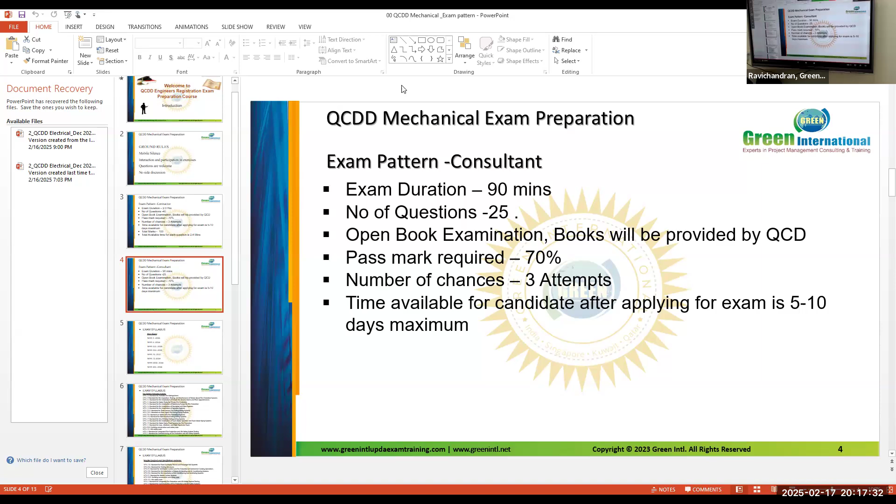So the syllabus - this is for the fire alarm, part of it. For the exam syllabus, it starts from firefighting: NFPA 3, 4, 10, 13, 14, 16, 17, 17A, 20, 22, 24, 25, 101, 2001, 2010, 750, and 5000. This is the exam pattern for firefighting.

All your questions will be focused only within this syllabus; apart from this, questions will not be asked. For example, for a standard like NFPA 110, they will ask what NFPA 110 refers to - it is the standard for emergency standby power systems. So you have to know that.

Actually, it's a multiple choice question. You don't have to worry about it or memorize anything else. You just have to focus on what is being given in the question, and where to hunt for the answer.

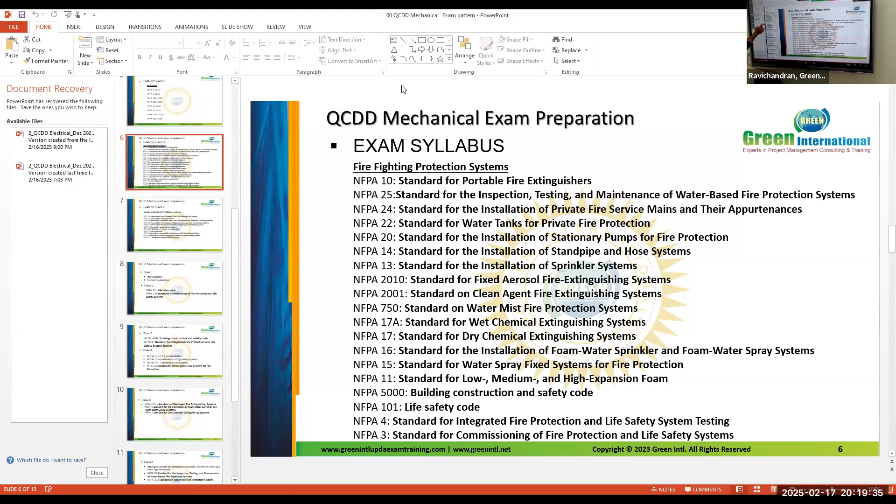So the exam syllabus for ACMV, or air conditioning and mechanical ventilation, has these 4 topics in common: NFPA 3, 4, 101 and 5000. It's common for all - for firefighting, ACMV is common, even for electrical, same.

So apart from this, mostly concentrated on 88A, 90A, 90B, 92, 96, then 130, 204 will be there apart from the common syllabus. ACMV is a very small topic focusing mainly on QCDD guidelines.

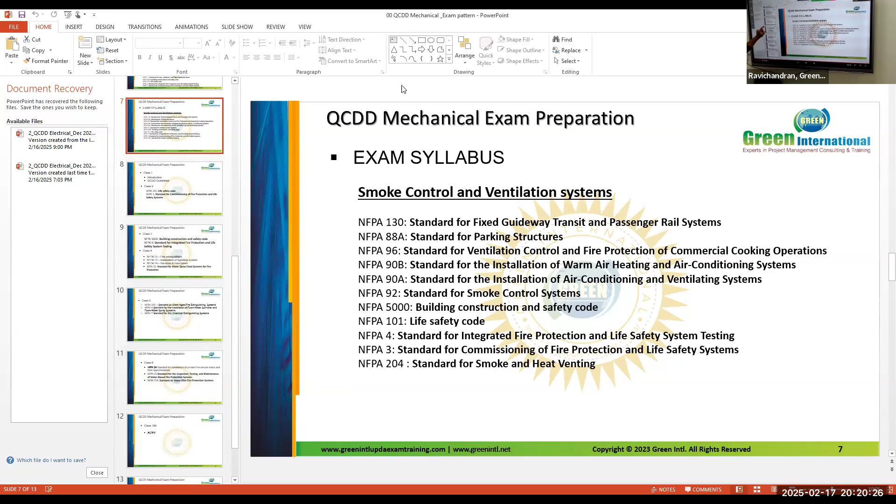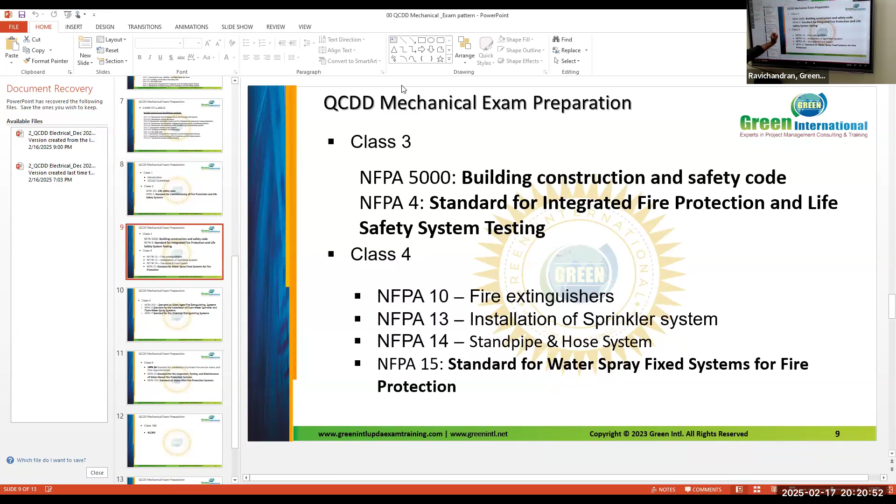So the classes are subdivided into 8 classes totally. First class is the introduction class, where we will guide you through the QCDD guidelines - today we will see only the QCDD guidelines. After that, the second class will be focusing mainly on 101 and 3, and the third class is for 5000 and 4, and fourth class is for 10, 13, 14, and 15.

So based on the requirement of the candidates, because some candidates may have an urgent exam at the very early stage - maybe they have applied for the exam and they appear for the class - based on their request, we may bring ACMV at the top in the initial classes and firefighting in the next class. But that will purely depend on it after our third class, because first class is common for all, second class is common for all, because NFPA 3, 4, 101 and 5000 is common for all.

So after the third class, they can decide either to go with ACMV or with firefighting. I don't have any issues to start with the classes, but it's a pure choice - we can go either with ACMV or with firefighting, and ACMV at the last. We can discuss at the third class which direction we have to move.

So this is all about the exam syllabus and pattern. Is there any doubt until this? There is no negative marking in this exam, and it's an open book exam, but it's not so easy as that - you have to be very familiar with the NFPA standards. That's the main thing to crack this.

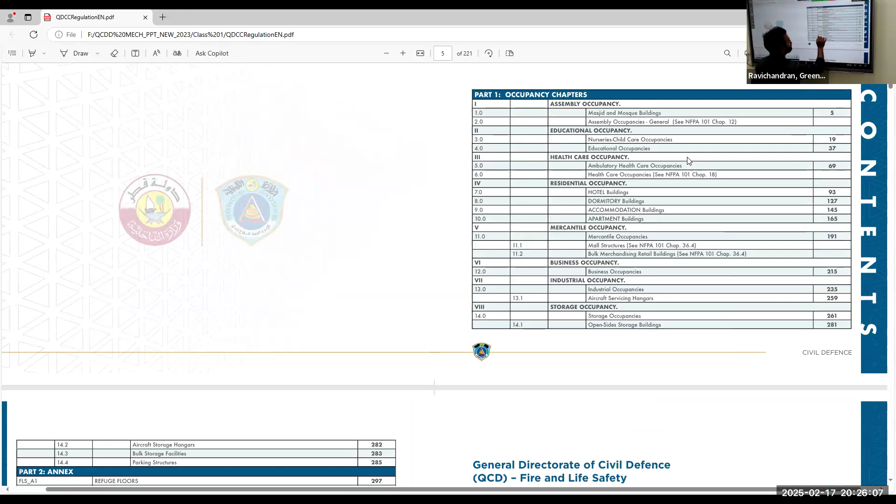Okay, so in the occupancies chapter, you can see there are different types of occupancies: healthcare, educational, assembly occupancies, mercantile, until the storage occupancies. In these topics, the questions mostly will be focused between residential, mercantile, and some questions in business occupancies. Within these three occupancy groups, the weightage of questions will be more.

It's not easy to study or learn through all these topics line by line, but instead please do focus on this group. There you will get more questions within this group, because if you read one occupancy group, the similar patterns can be repeated in all other groups, like habitable height, means of egress. All these things will repeatedly appear in all the occupancy groups, with only a minor difference. So you have to focus on three different groups: residential, mercantile, and business occupancies.

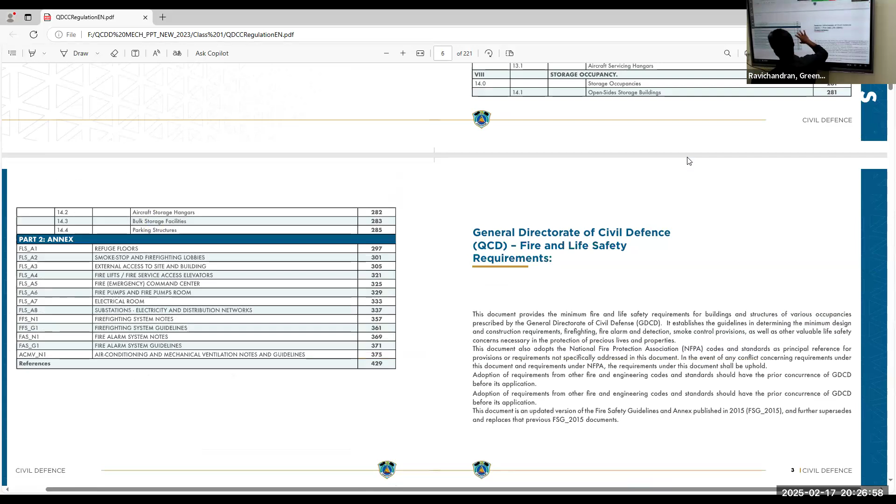And apart from this, the question will be mostly asked from this annex section. From the annexer section, there will be refuge floor, smoke stop and firefighting lobbies, external access. There are different types of annexer sections. If you are focusing as a consultant, you will get all these questions from all these topics in the annexer section. There will be almost 200 pages. You will get questions from between 297 and 429. There will be plenty of questions in this annexer section.

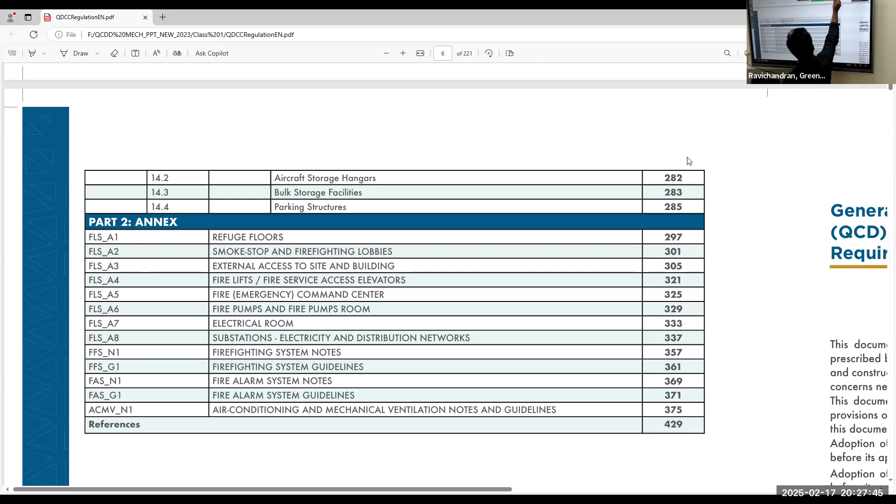If you are a contractor, if you are in firefighting, so you have to focus on firefighting system notes, fire pump, and fire pump room. That's it. These three topics you have to be very clear about for firefighting.

And if you are for ACMV, you have to focus on ACMV. This is very important for ACMV. So if you are a contractor for ACMV, this topic is very important to get it passed. Without studying this topic, you cannot pass. If you are appearing only for the ACMV, this topic is so important because it's around 50 pages, but more weightage of questions will be from this section. If you are appearing for the ACMV exam, or if you are appearing for the firefighting exam, you have to focus on these main three groups apart from the occupancies.

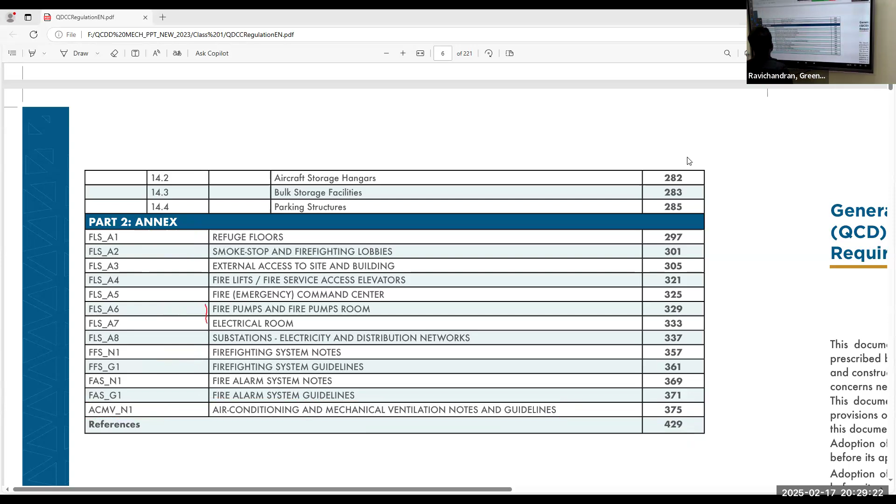Okay, this is for QCDD guidelines. So if a question is being asked, let's say a question, what they will ask is, they will give you a ramp slope. Maximum slope shall be 1 in 12 inch.

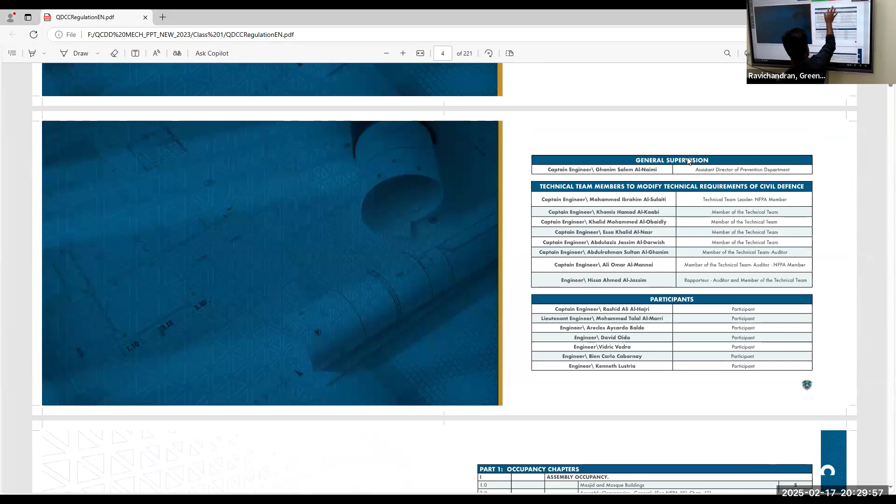Maximum cross slope shall be 1 in 48 inch for this occupancy group. Let's say this is masjid and mosque, and masjid and mosque comes under assembly occupancies. So they will not say masjid and mosque, they will give you assembly occupancies. So the ramp slope of this parameter, ramp slope of 1 in 12 inch, that is slope, maintenance of slope, is required, permitted, allowed or not allowed. The options will be given like this. So you have to know this content where it is in the assembly occupancies.

You have to go to the ramp section. You have to check whether it is required, permitted, allowed, or not required. So there will be options like that, because here you can see required, and in some areas you can see it is not required, and in some areas it will be permitted.

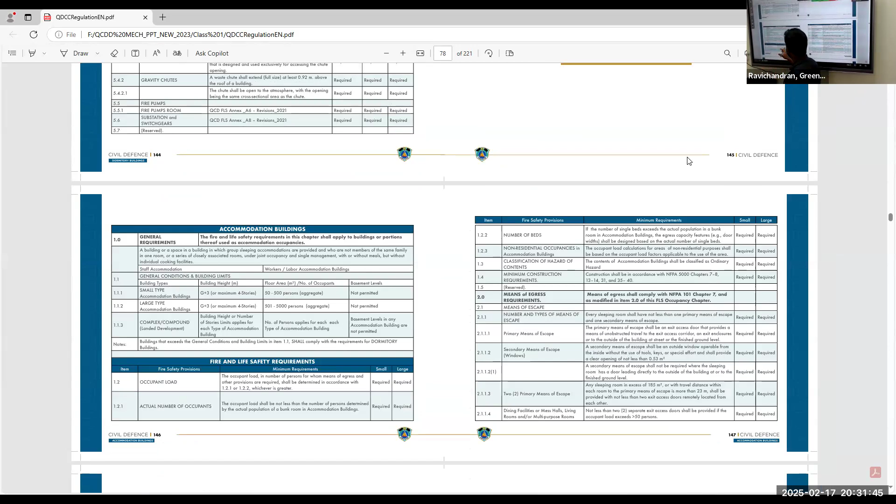So they will ask you the occupant load. They will give you a definition and they will ask you what this term refers to. So: a number of persons for whom means of egress are provided in accordance with the actual number of occupants, not less than to be determined. They will give you a sentence and ask you what it defines. So we have to know whether it is occupant load factor or occupant load. There will be some minor difference between this.

So definition is very important. Definition you will get in 101, 5000, as well as from QCDD guidelines, because in the QCDD guidelines you will get more or less the same content as from 101 and 5000. Almost the same.

They will ask you mainly from the illumination - that is very important when you are appearing for the exam. There will be a lux value, so 0.1 lux or 1.1 lux for how many duration - 1.5 hours, or after 1.5 hours, what will be the lux for the emergency lighting? Such questions will be asked from this section.

And the means of egress - what is the width and height of the means of egress? What is the slope you have? You can be allowed to use that.

And the firefighting rating of smoke stop lobbies or areas where the peoples and occupants will be in the safe area - those areas they will ask you what is the wall fire resistance. Like 2 hours there, 1.5 hours is there, depends on the area.

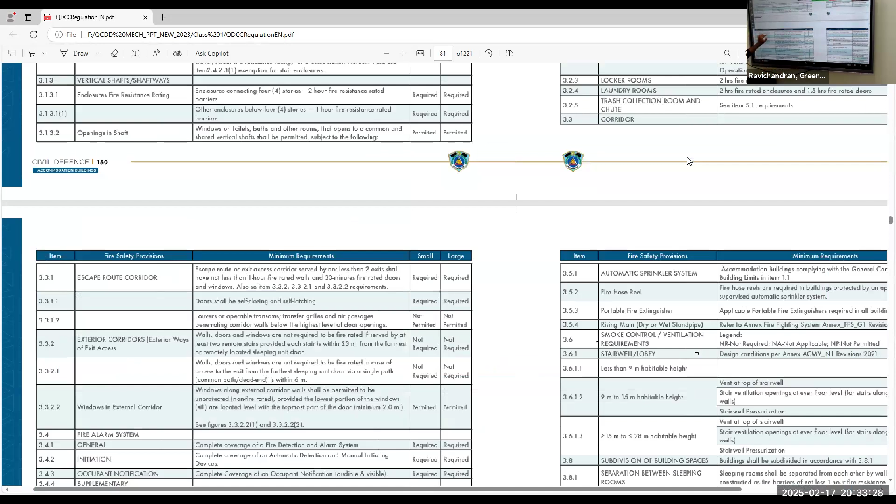Of the means of egress. If you see escape route corridor - escape route or exit corridor served by not less than 2 exits shall not have less than 1 hour rated walls and 30 minutes fire rated doors and windows. So they will ask you, how much is the fire rating hours for escape route corridor?

They will give you with the options. They will not give you simply with the escape route corridor - they will specify whether it is assembly occupancies or accommodation occupancies. They will specify in which occupancies what is the corridor firefighting rate. Such questions will be asked.

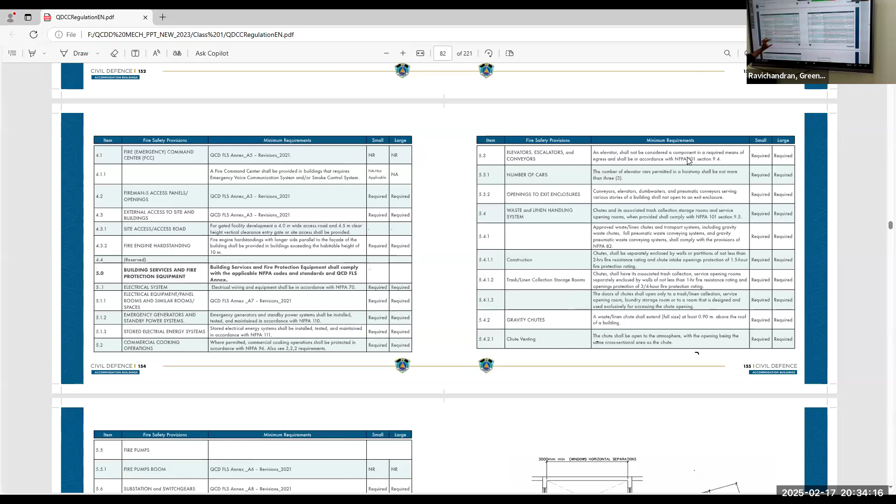And apartment building - so in the apartment building, they once asked the low-rise building, what is the height criteria. So whether it is 15 meter or greater than 15 meter or less than 15 meter, they will give you the options like that, you have to select one, for the low-rise building.

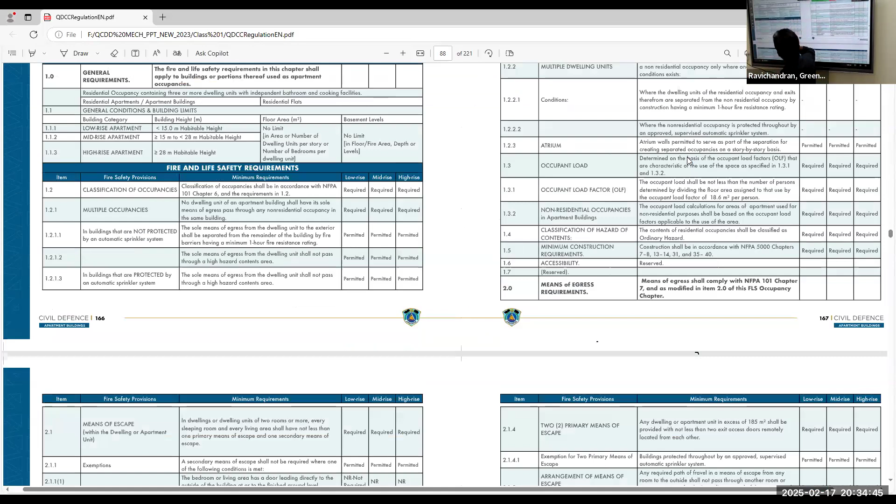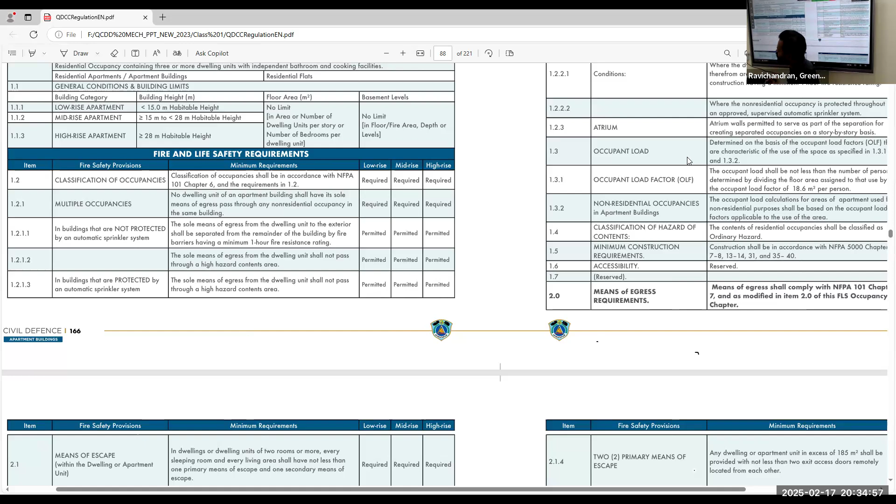And yes, in the buildings that are not protected by automatic sprinkler system, what is the fire barrier resistance if it is not protected by the automatic sprinkler system? So such questions have been asked in your previous exams.

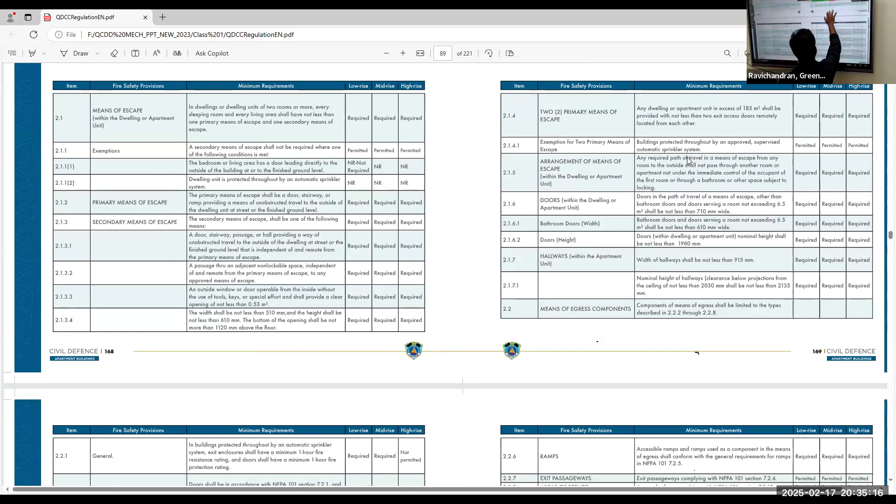And means of egress - the questions will be asked mainly from the means of egress. Yes, the common path of travel - the travel, they have given this definition and they asked what is this meant for. So such definitions will be there.

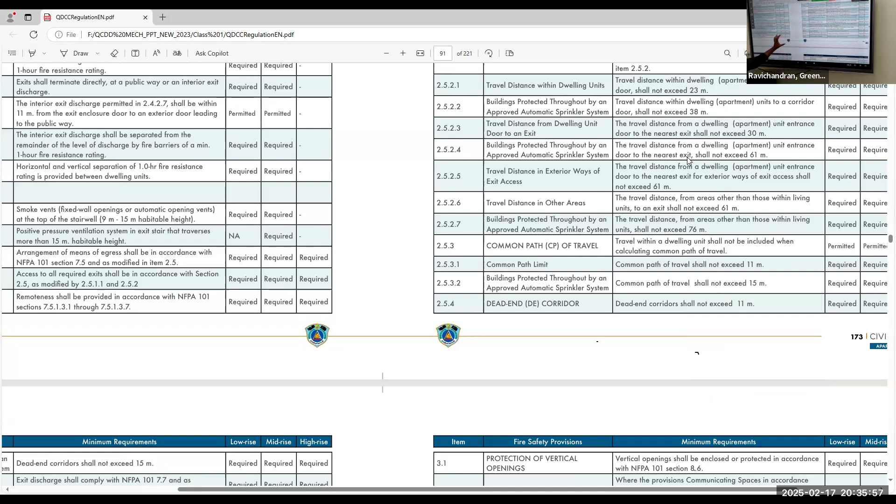So all these contents will be available in the QCD guidelines. Apart from that, they will not ask anything else - only the NFPA with the specific codes will be asked apart from the syllabus, but all the content they will be asked only within the syllabus. So you have to be very familiar with QCD guidelines. QCD guidelines is very important because in the recent exams they are focusing mainly on the questions related to QCD guidelines, more than the NFPA.

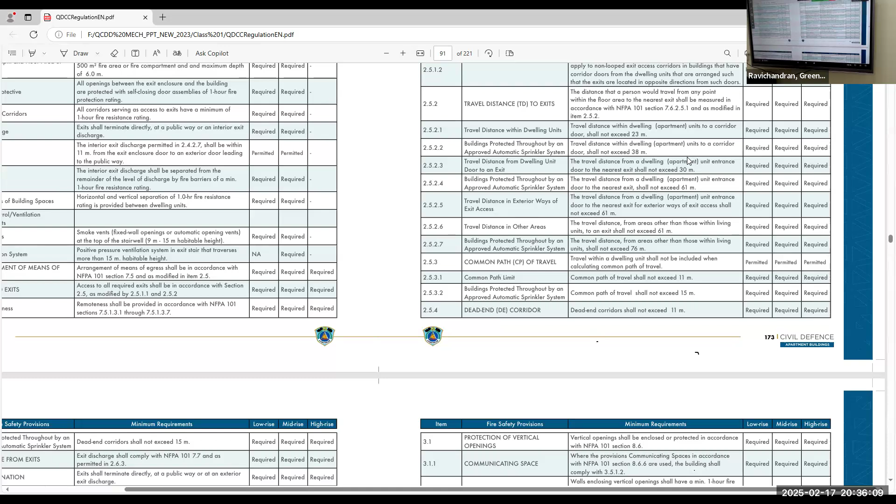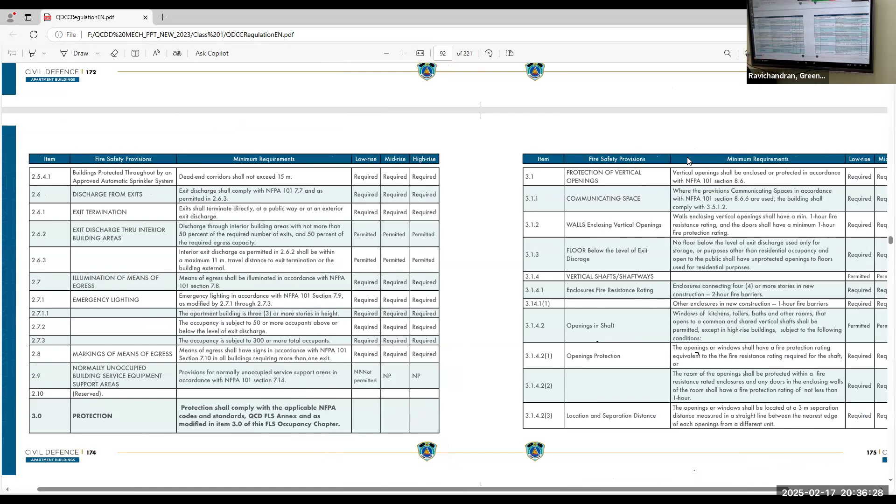So in these areas, they will ask you permitted, required, or not permitted. They will give you a scenario like this - occupancy subject to 50 or more above or below this exit discharge, emergency lighting is required or permitted. Such questions will be asked. They will formulate the questions and ask for this.

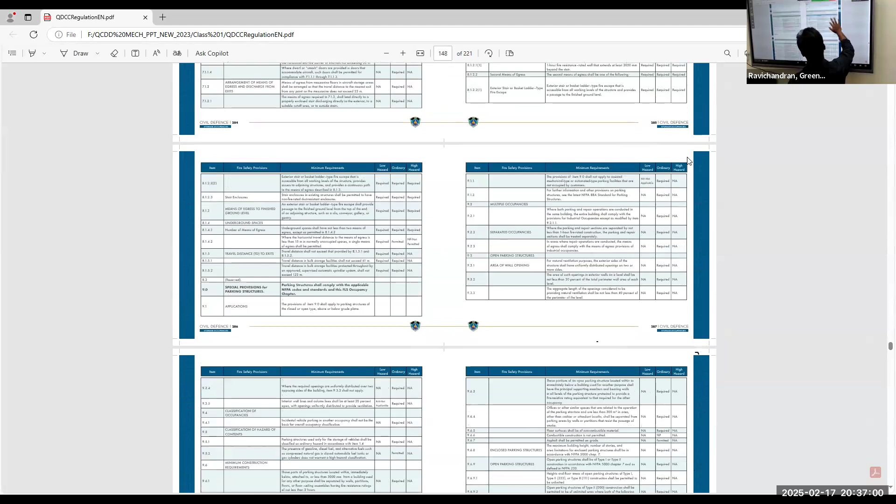So the thing you will get in the annexure section - there is an annexure section. Yes, so until this is the occupancy group - different occupancies group, you have to focus mainly on the type of occupancies, and the residential occupancies is very important. Business occupancies and mercantile occupancies is the next weightage to the residential occupancies.

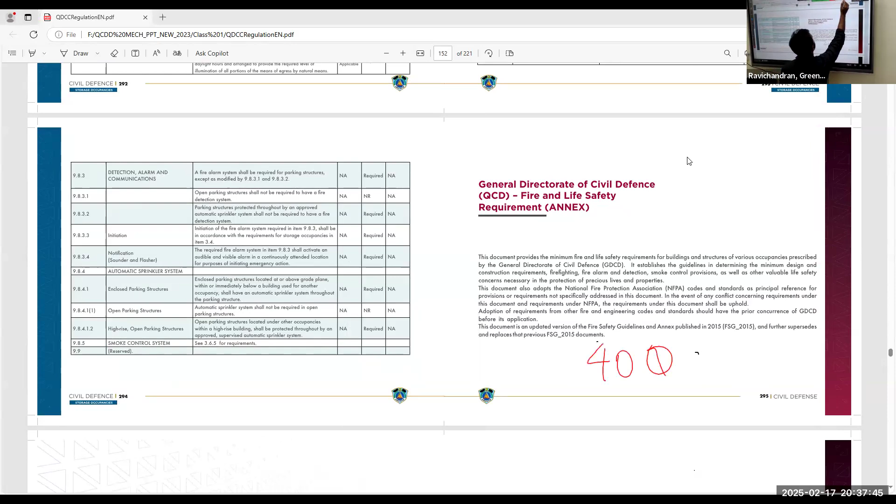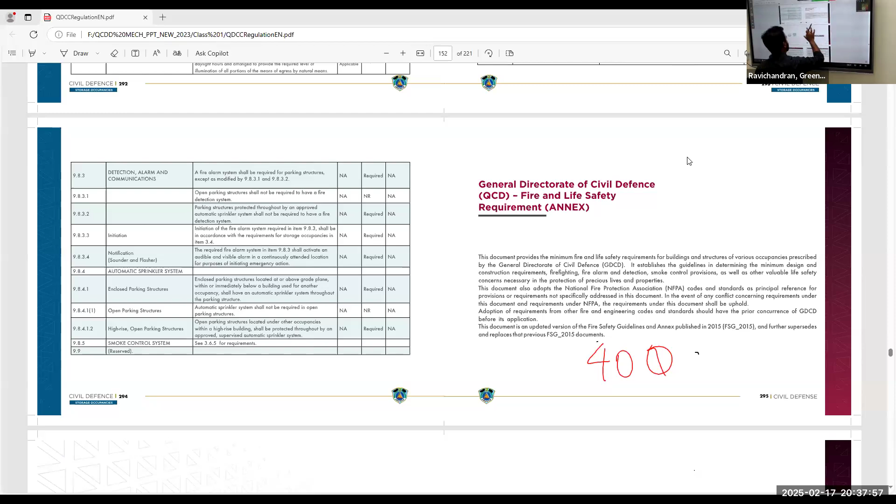So if you are as a contractor in the QCDD guidelines, if you are in firefighting, out of 40 questions... If you are appearing for firefighting exam, out of 40 questions, you will get roughly 15 to 18 questions from QCDD guidelines.

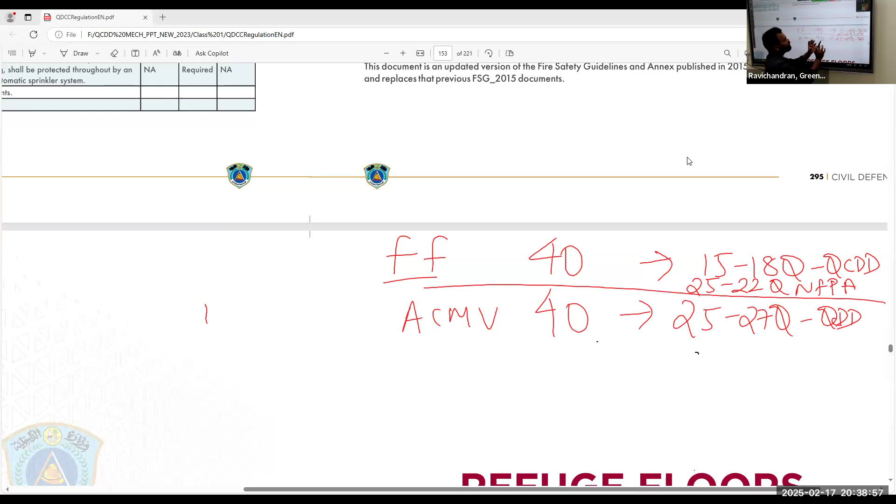Okay, if you are as a consultant, your questions will be 25. You will get 7 to 8 questions from QCDD guidelines, remaining 15 to 16 or 17 questions from all other NFPA - this includes firefighting or ACMV. This is for consultant.

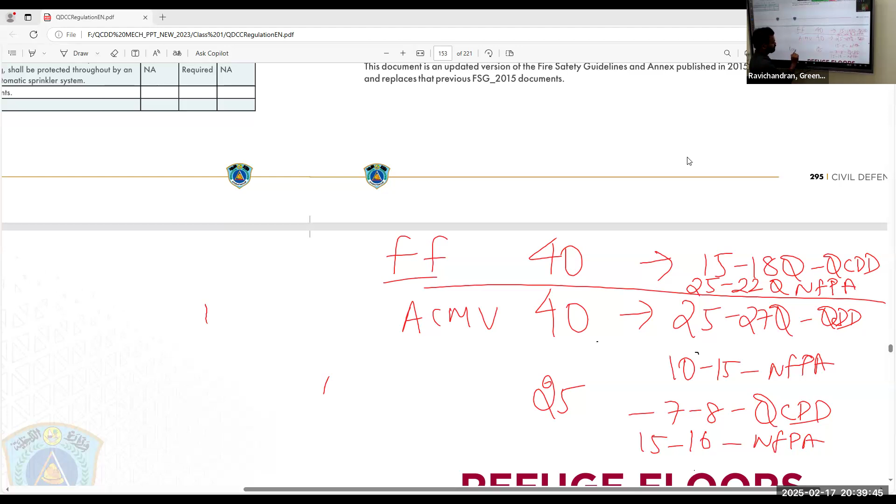This is for consultants. Out of 25 questions, you will get 7 or 8 questions from QCDD guidelines, and rest of the questions from NFPA - it will be a combination of firefighting and ACMV. The syllabus is same for contractors as well as for the consultants, but the weightage of the marks only differs.

So as a consultant, you have to appear for both ACMV as well as firefighting classes. But for the contractors, it is up to you to opt - either you can appear for the 2 classes, there is no issue, or if you are focusing only on firefighting, you can focus only on firefighting. If you are into ACMV, it's up to you to decide. The class will be continuous and you are always welcome for both the classes.

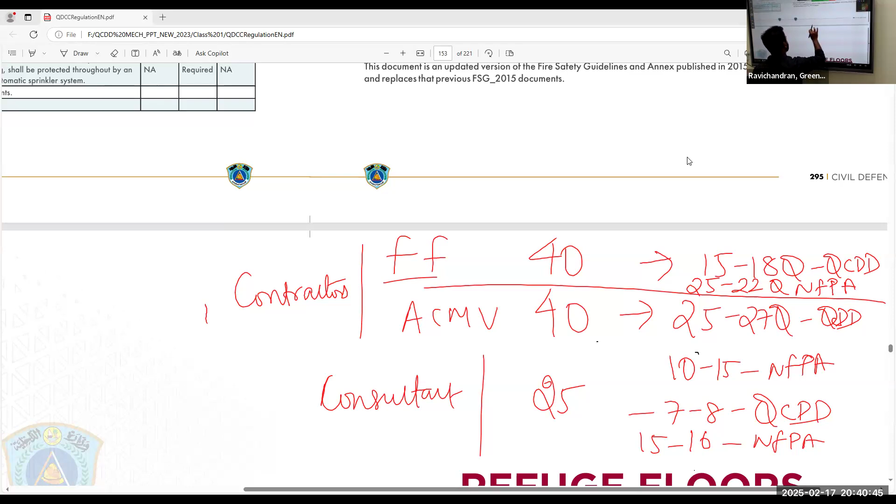So from here, the annexure section starts. First, the refuge floor. In this, they have asked a question: holding area of naturally ventilated permanent openings at least 2 sides of external wall. The height of the opening shall not be less than how much high?

They will not tell you that this question is from QCDD guidelines, or you have to refer this NFPA. You have to be familiarized with whether you have to opt for the QCDD guidelines or go for the NFPA. For that, you have to familiarize with guidelines, because it is not easy to read all the contents in NFPA and remember them. But guidelines are very small.

It's just a use of some important contents which you have to know. If you read one annexure, it is just 2 pages. Refuge floor is just 2 pages. So whenever you get time, just read one annexure a day. There are only 7 or 8 annexures apart from ACMV, which is a huge one. So reading one annexure, 2 pages in a day, is very possible, right?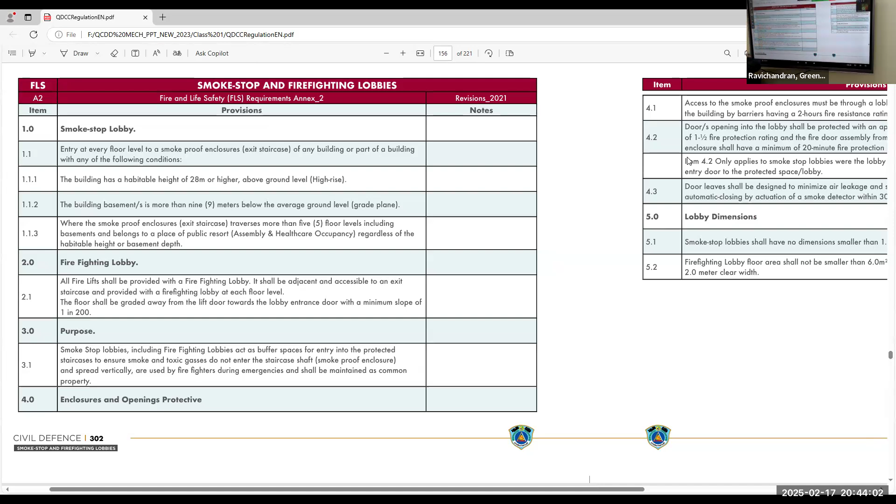This is another important area where firefighting or ACMB people have to be focused on. The questions will be asked for smoke stop lobby enclosures - what is the habitable height and the building basement - more than they have asked the question mainly on

this, hour rating is very important. Okay, in these 40 questions you may expect to get 3 or 4 questions mainly for the hour ratings of this particular area or particular wall. They will ask you the hour rate, fire resistance rate. So each area will have a different fire resistance rating. That's very important.

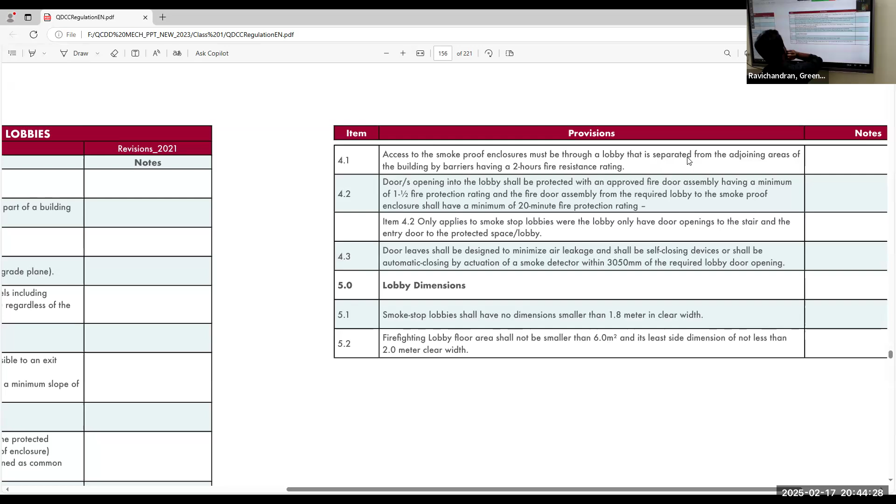This area you have to be focused on mainly for those who are focusing on ACM, smoke, stop, and firefighting lobbies - the questions will be from this section. And external access to site of the building - they rarely ask the question from this external access.

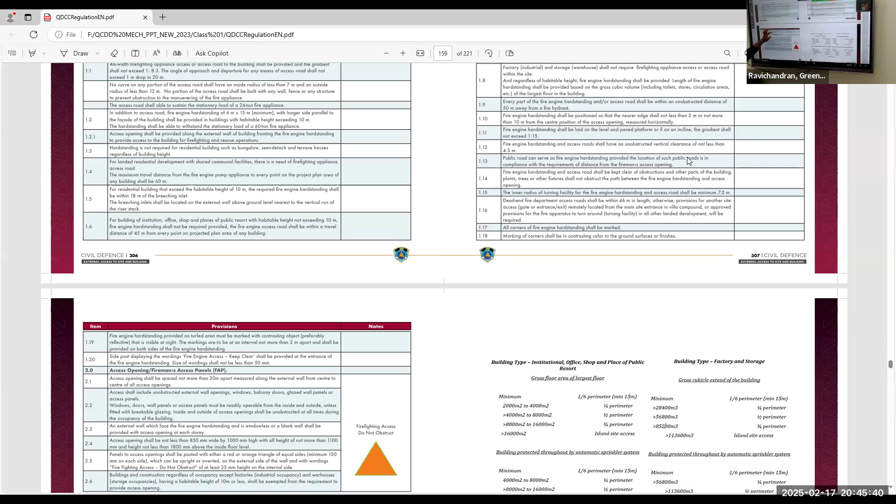But I forgot to mention, in the 40 questions there will be 2 or 3 general questions. If you are in contractor field, in the 40 questions there will be 2 or 3 general questions - you don't know where it comes from. But those topics will be coming from the areas in the QCDD guidelines which are not your domain, like they will ask you from the electrical part, from NFPA 72. That general questions will be there, but that will be in the guidelines. So those topics you can expect from these areas, external access or site buildings - 2 or 3 questions will be there, asked from these areas.

Fire lifts and fire service elevators - that's not part of our syllabus because it's not related to firefighting or ACMB. But in the general questions, you can expect 1 or 2 questions from this topic. Normally they are asking 3 questions from general topics - 1 question which is not part of NFPA from the syllabus, and the other 2 questions they focus mainly on the guidelines, which is not our domain. They will ask from electrical point, electrical or site access, something like that.

So, fire emergency command center or FCC. This is also important for those who are focusing on ACM. Fire command center or FCC is important for ACMB.

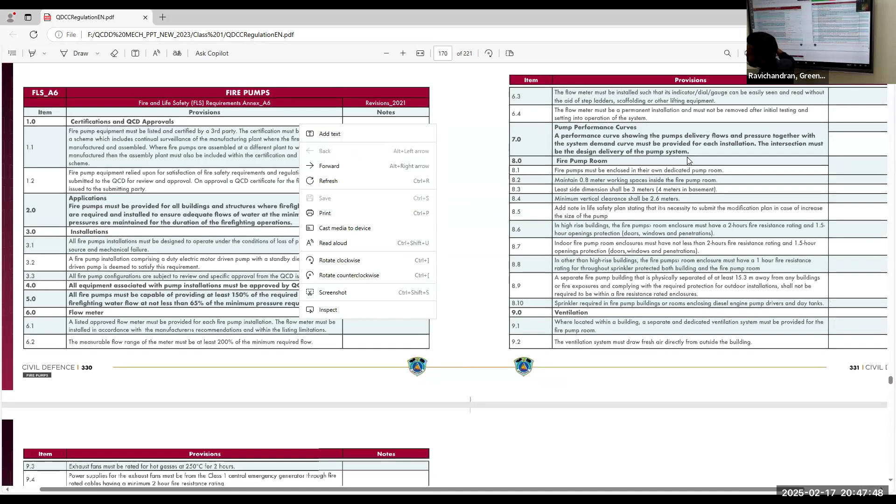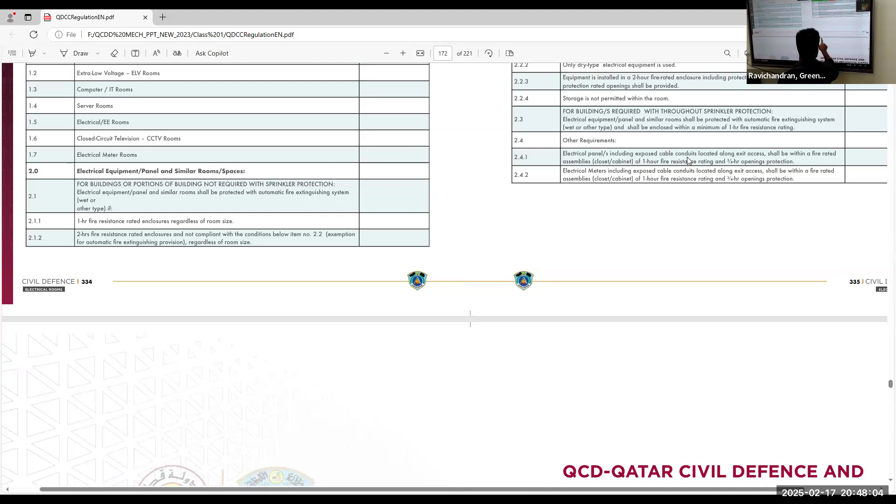Such questions you can expect from this annexure section. This is mainly focused for those who are focusing on firefighting. Electrical room, as I said, it's not important for you, but for general questions they may ask 1 or 2 questions which may cover this topic. This is not important for you.

The firefighting system notes. This is very important for those focusing on the firefighting exams. There are plenty of questions they have asked from this section. This section will be a compilation of NFPA 13 and 14 - NFPA 13 sprinkler systems and NFPA 14 standpipe systems. So you have to focus on NFPA 13 and 14 as well as the firefighting notes. For sure they will ask questions from this. I don't know how many questions, but 100% they will ask a question from this topic.

So firefighting system guidelines, another important topic for those appearing for the firefighting exam. This is also for NFPA 13. You can expect many questions from NFPA 13 as well as NFPA 20. So 13, 14, and 20.

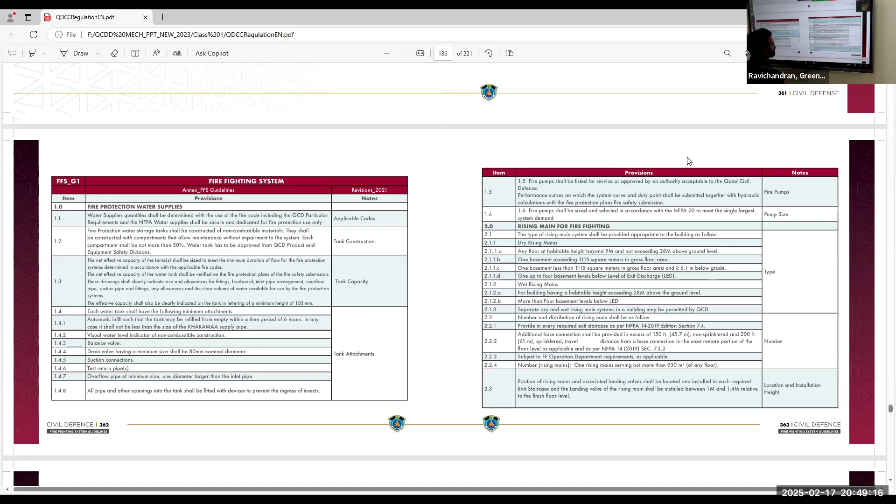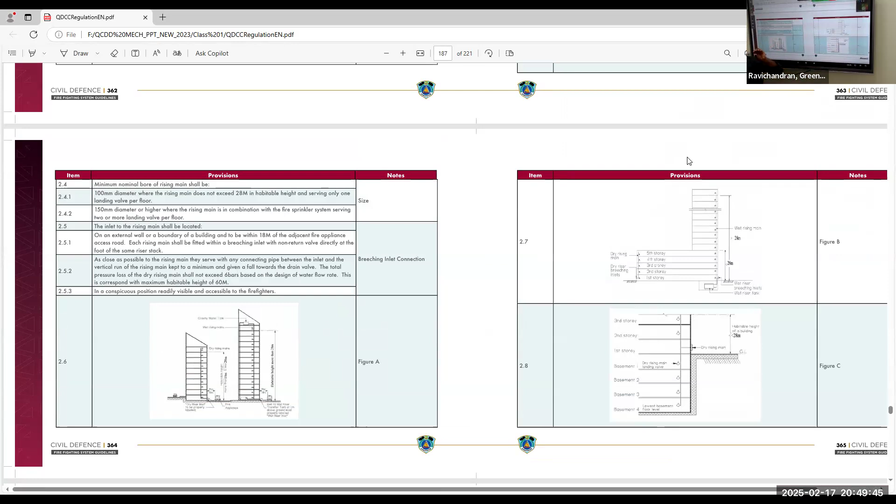They once asked the square meter of gross floor area for the rising main for firefighting, and they once asked the habitable height - how much is the habitable height of this area - that is given here as 28 meters, as well as from the drawing you can refer to that. Because some questions they will ask from the drawings as well, not only from the content. So it's sometimes hard to pitch for the searching of that particular concept.

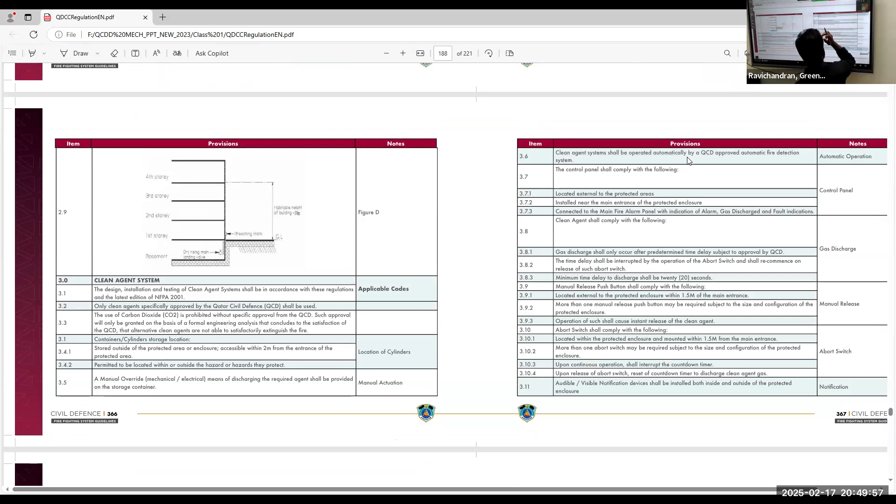So clean agent system, this is the one which we were discussing. They have asked the delay - minimum time delay to discharge shall be 20 seconds. This is as per QCDD guidelines. But as per NFPA 2001, it is 10 seconds. You have to focus on the value given in QCDD guidelines, not as per NFPA 2001.

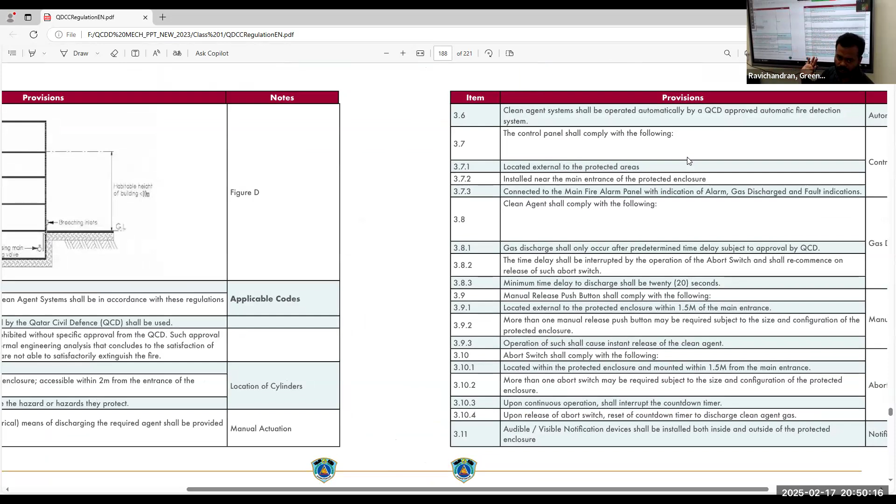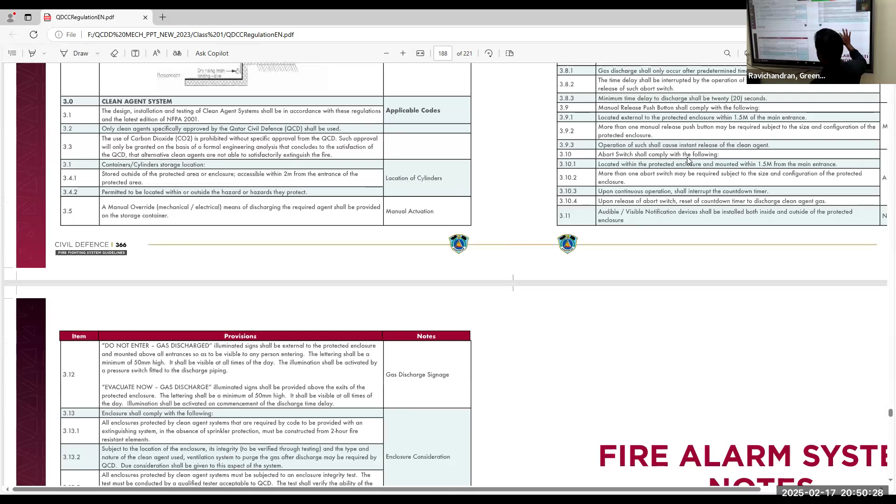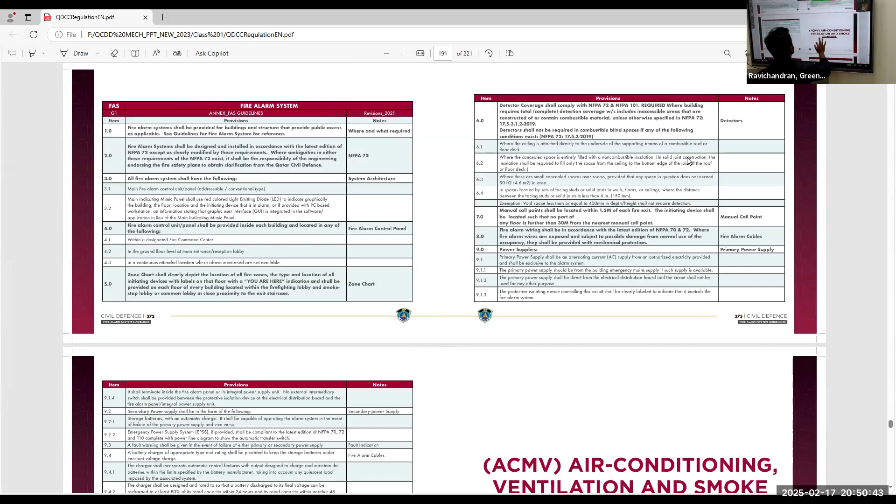Here, QCDD guidelines surpasses the value of NFPA, so you will get the values given in QCDD guidelines. Again, that topic is mainly important for firefighting. As far as those appearing for firefighting, this is not much important for you. And those into ACMV, read this topic at least twice, because this topic is very, very important. You can expect many questions from this topic.

They are asking the definition from this section, like smoke management or smoke containment. You can get some definitions from this zone smoke control system. So the different pressure difference - for fully sprinklered, how much is that? If it is non-sprinklered, what is the pressure difference? And the opening force for the door.

That is when the stairwell pressurization is done. What is the opening force? Minimum, maximum opening force - that is 110 Newton. But in QCDD NFPA, the value is different, so you have to again refer to the value given in QCDD guidelines, because this topic is very important when you are focusing on QCDD guidelines.

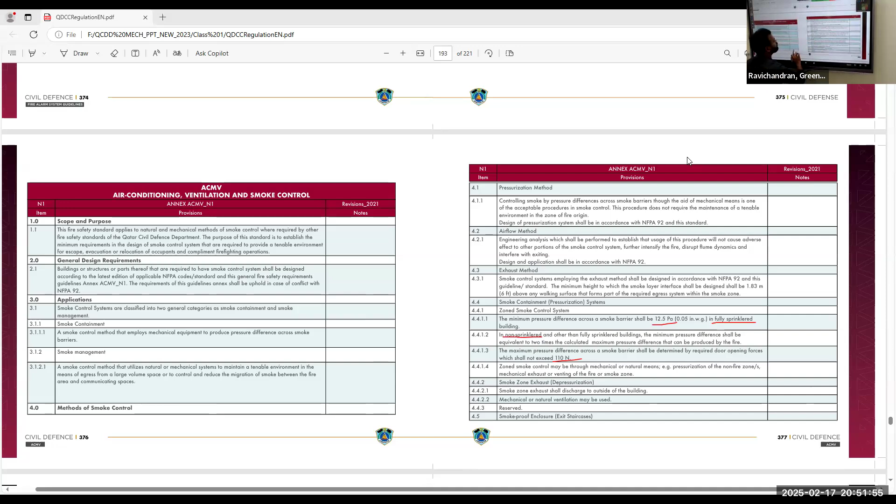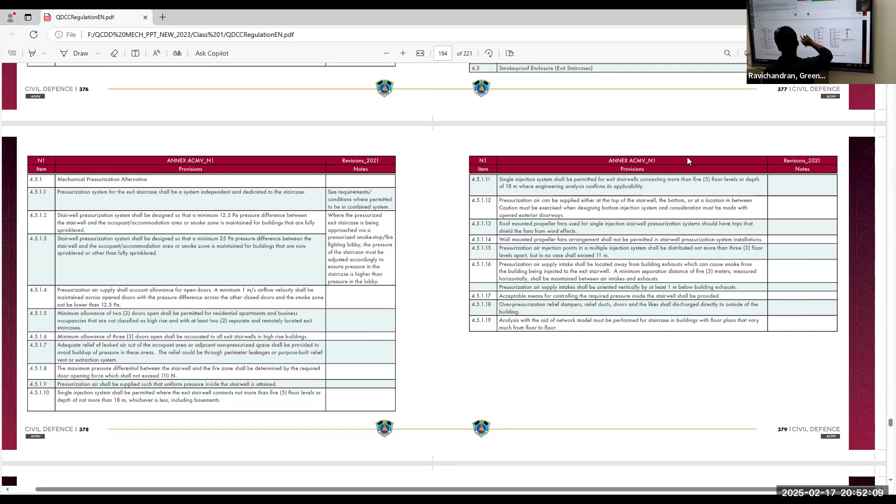There are plenty of questions they have asked from this for pressure difference from the smoke zone to other areas, and what is a single injection system, what is a multiple injection system. They asked many questions from this. So here, what is the level given for multiple injection systems? They asked from the drawing.

Apart from this, pressure difference between the automatic sprinkler systems, between the smoke zone and here you can see the difference between the different areas. So from staircase to lobby system, there will be a difference of 5 Pascal. From lobby to corridor, a difference of 5 Pascal, and corridor to smoke control zone, it will be 12.5 Pascal. The minimum pressure difference at any section we will maintain is 12.5 Pascal.

So here you can see for each area, this is for the building protected with automatic sprinkler systems, and this is for the building not protected with automatic sprinkler systems. They have asked the question from this section as well. This is for those appearing for the ACMV - you have to focus on this particular thing.

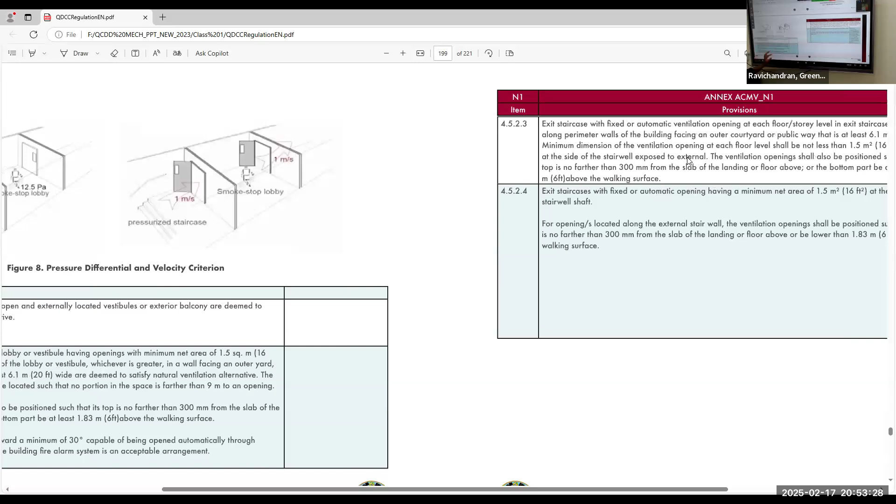Pressurization, escape route, and natural ventilation - the ACH is important. In this, they have asked how much ACH.

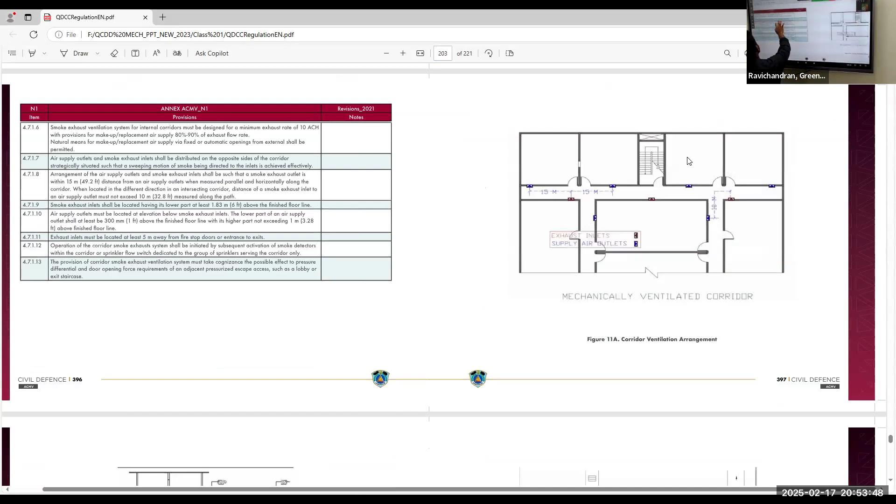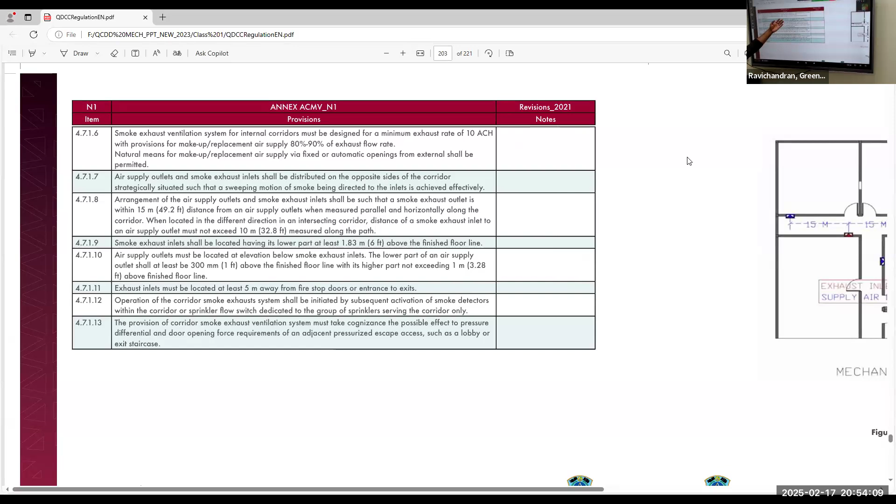In the smoke system designed for a minimum exhaust rate of 10 ACH with the provision of makeup or replacement air, which is 80 to 90% of the exhaust flow rate - that's a thumb rule, not a standard rule. We will maintain 80 to 90% of inlet than the outflow.

So such ACH questions will be there, not only for this particular area, there will be other areas where you need to have the air change per hour. They will ask the question from here. Here there is 6 ACH minimum and 10 ACH under smoke mode. So this is very important, for car parks, refuge floor and smoke control systems.

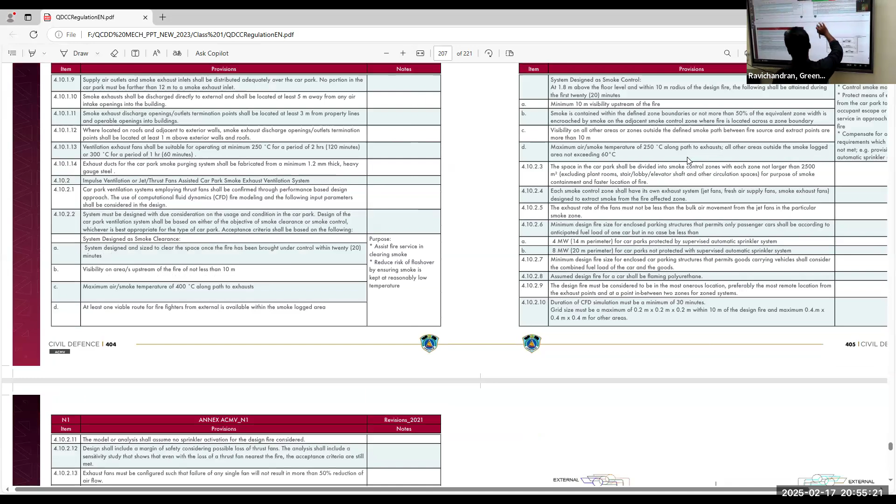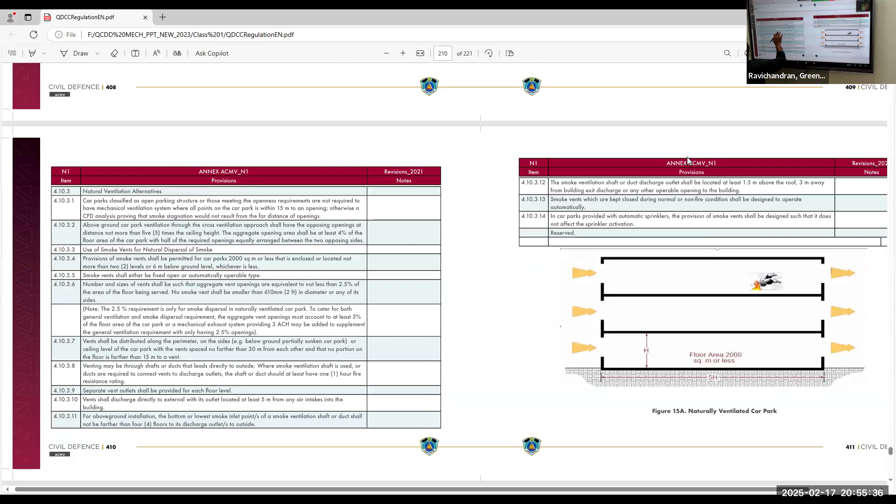For natural ventilation, they asked the provision of smoke vents shall be permitted for car parks of 2,000 square meters or less, enclosed shall not be more than 2 levels or 6 meters below ground level, whichever is less. They asked one question from this.

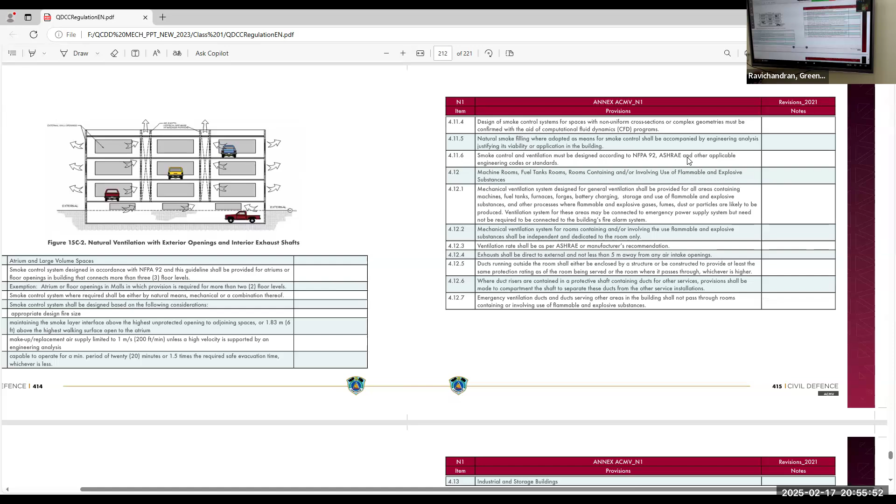For large spaces, makeup air supply is limited to 1 meter per second unless a high velocity supported by engineering analysis. So what is the makeup air velocity? They have asked one question from this.

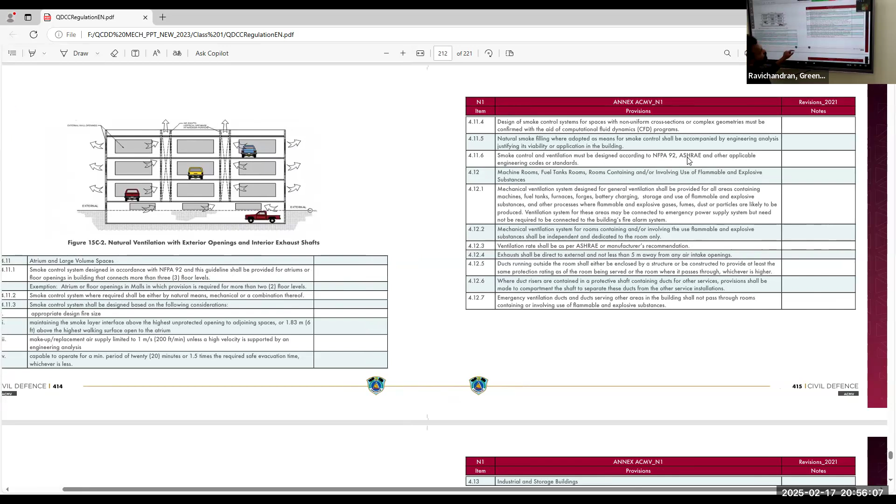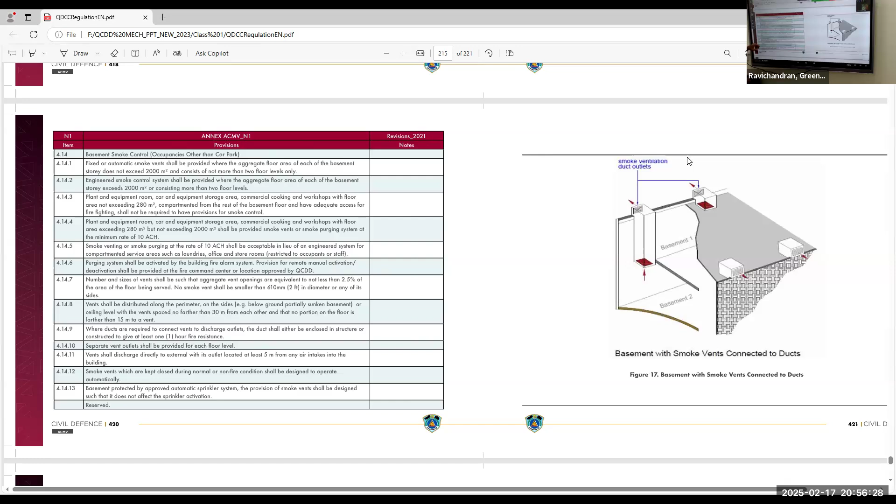As we said, ACH for different areas will differ. So you have to be familiarized with the basement control, smoke control system. They will give you that particular area and ask the question from this. You must know each topic - what are the topics given here and what is the content given here.

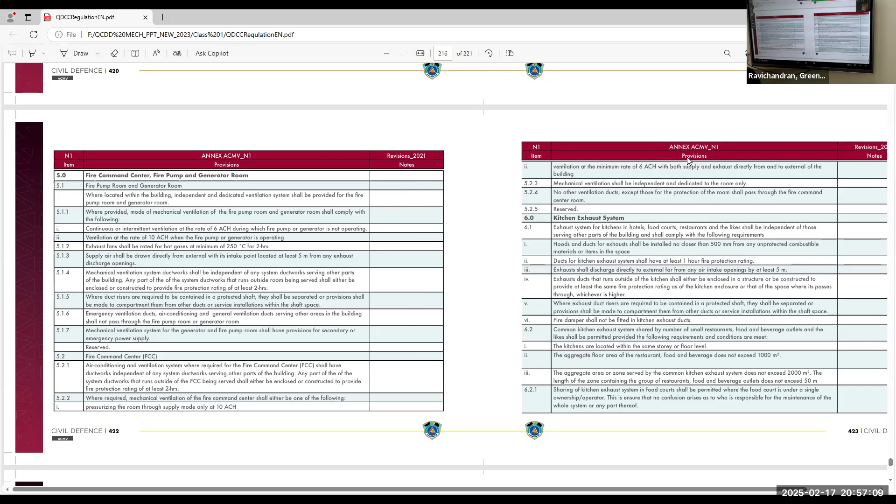If you are into ACMV, this guideline is very, very important. Out of this ACMV, there will be 40 questions for contractors. 25 questions will be from the QCDD guidelines. In that 25 questions, from this section, you can expect around 10 questions only from this guideline, only from this section. The weightage will differ - 2 marks, 3 marks, 4 marks will be there. The weightage of the marks will differ.

And if NFPA is being asked, which is not in your syllabus, you can refer this NFPA in this area. In the QCDD guidelines, there is a reference section. In this reference, you can get an n number of NFPAs. They will give you what NFPA 704 is meant for, or the standard for identification of this system, which NFPA it is - whether it is 704 or 664 or 502 or 400 - which will not be familiar to you. They will give you 4 different codes. You don't have to worry about that. You can come and refer to the reference section of QCDD guidelines, given at the bottommost end of the QCDD guidelines, where you will get all the NFPA codes.

Even if it is not here, go to NFPA 5000 - it will have all the codes. In the reference section, you will get all the NFPA codes in NFPA 5000. Don't worry about it.

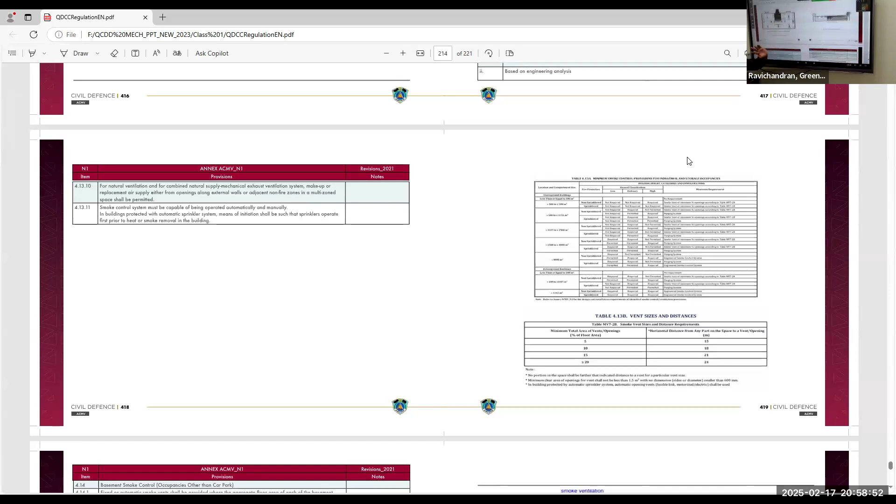So today we are focusing only on the QCDD guidelines. You can see some questions regarding the QCDD guidelines.

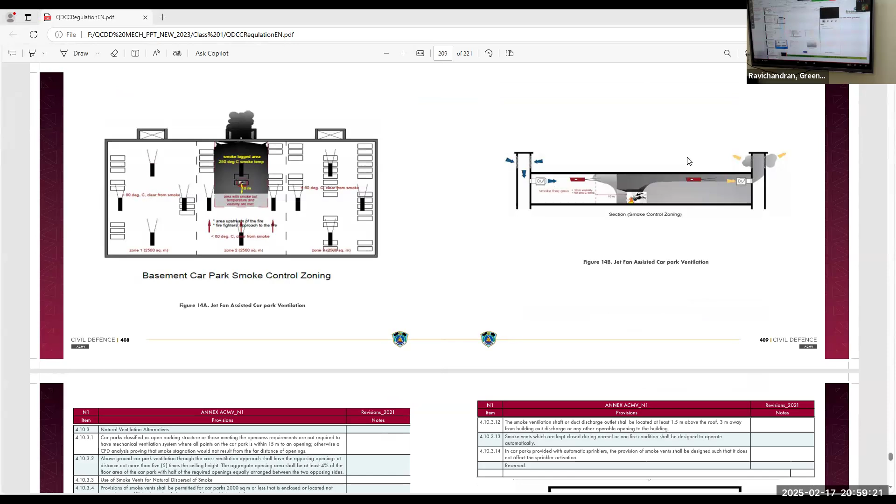Mechanical ventilation smoke control system shall be provided for car parks located below ground or enclosed having floor area of more than... Excuse me, screen, not sure. Can you see this? Yes. Okay.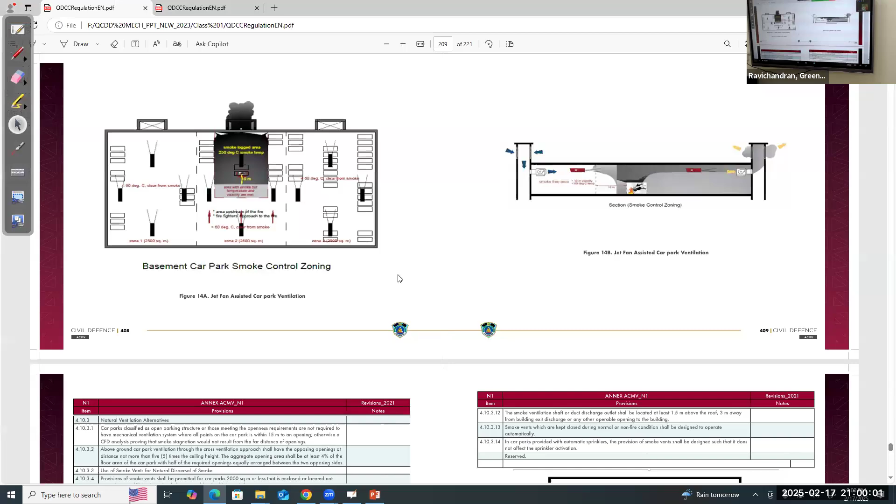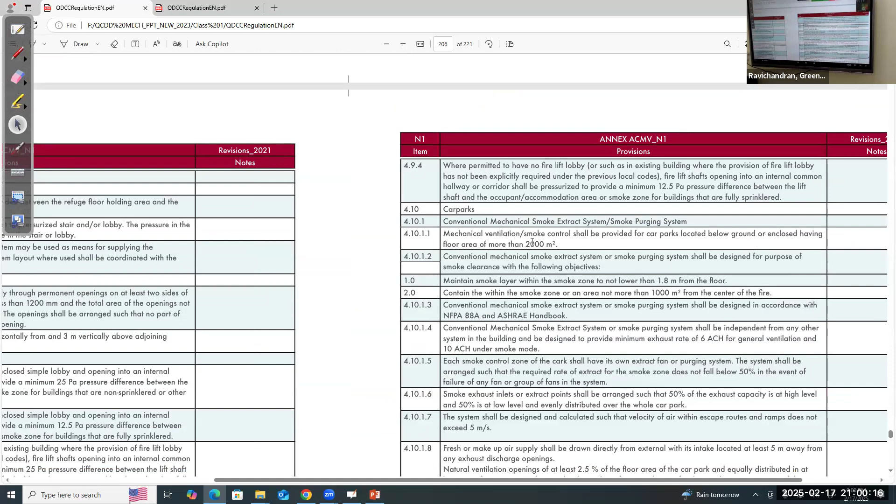So mechanical ventilation and smoke control shall be provided for car parks located below ground or enclosed having floor area of more than - this comes under the ACMV guidelines. So the car parks which will be given - this is car parks. Mechanical ventilation, smoke control shall be provided for car parks located below or enclosed having a floor area of more than 2000 meters square. So the option is 2000 meters square.

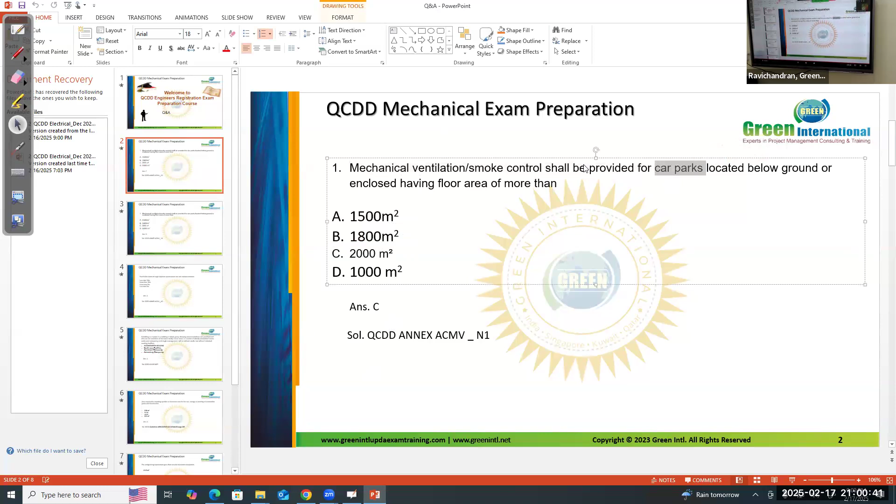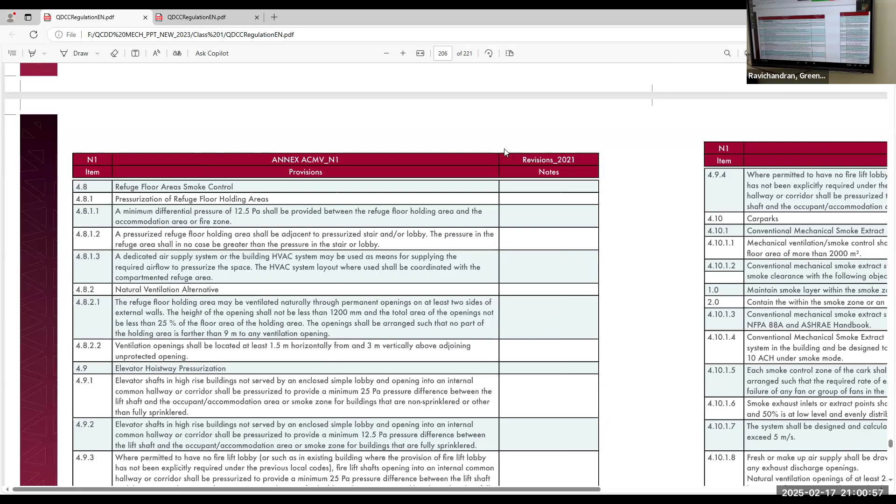Can you please repeat how did you find the section? Mechanical ventilation - they have asked the question for car parks located below ground or enclosed having floor area. So the car parks come under the ACMV annexure section. You can see the car parks. That's why you have to be familiarized with what are the refuge floor area - elevator hoist pressurization, car parks. Each section you have to know. Only then you can easily identify where the question comes from.

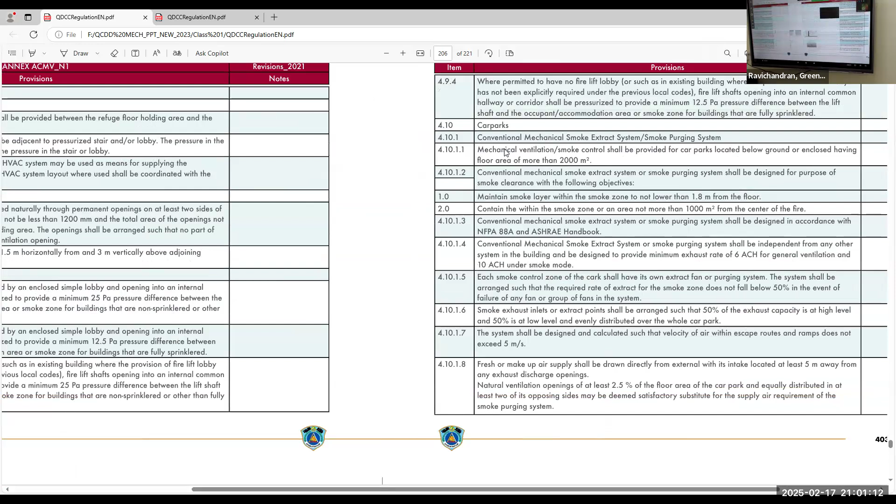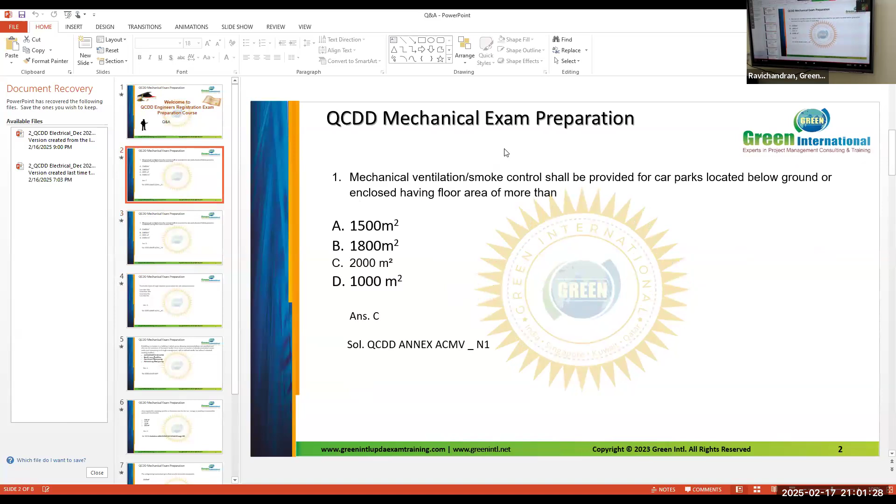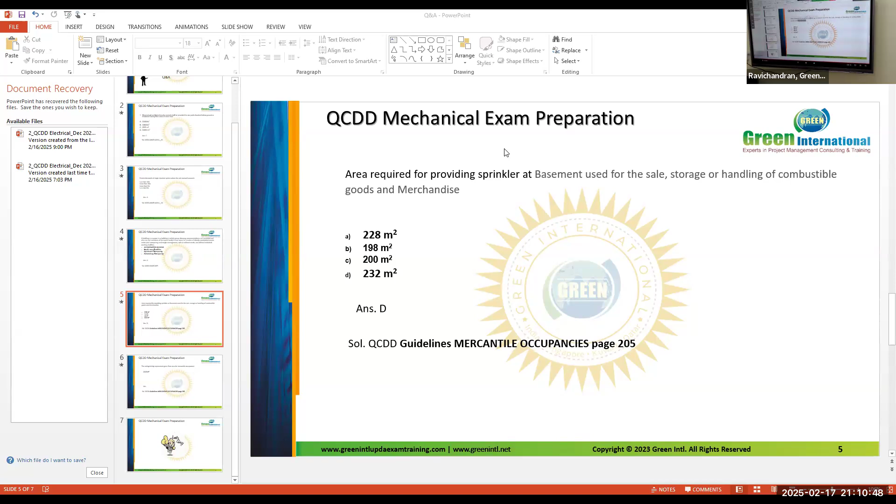So here they will give you some hints. If it is in merchandise, it will be on mercantile occupancy, or else they will give you terms like mercantile occupancies. For these mercantile occupancies, you can go directly to the QCDD guidelines. There is an occupancy group, you can see the mercantile occupancies here. In mercantile occupancies, you can see the gross floor area throughout all the occupancies exceeding a gross floor area of 1115 meter square.

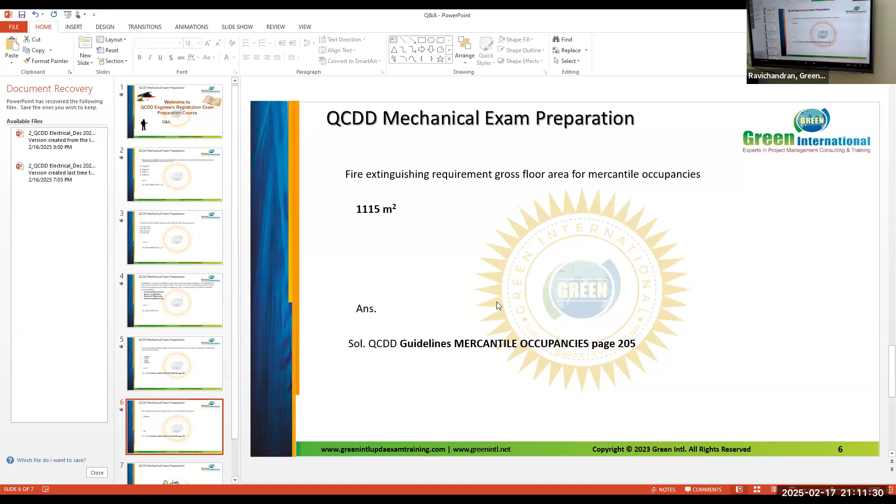So it's an important thing to differentiate whether you have to go for NFPA or QCDD guidelines. It's very important because you have to know what is there in the QCDD guidelines. Only then you can understand the question which is coming from guidelines or from other part of NFPA.

And important thing is you cannot press Control F and search in NFPA, it's a scanned copy, not a searchable copy, so you have to manually search it. But QCDD is searchable. From the review of our previous students who appeared for the exam, initially they said it was not searchable, but our last batch and previous batch said they can do the search only in the guidelines, not in the NFPA. NFPA is scanned.

So today, as we discussed, we have focused only on QCDD guidelines. Try to start your reading of the guidelines in the annexure section as well as from the three occupancy groups: residential, mercantile, and business. Residential occupancy is a big occupancy group, but just know what are the contents available - what is occupancy load factor, what is means of egress, what is illumination, all these things. Just roughly go through this.